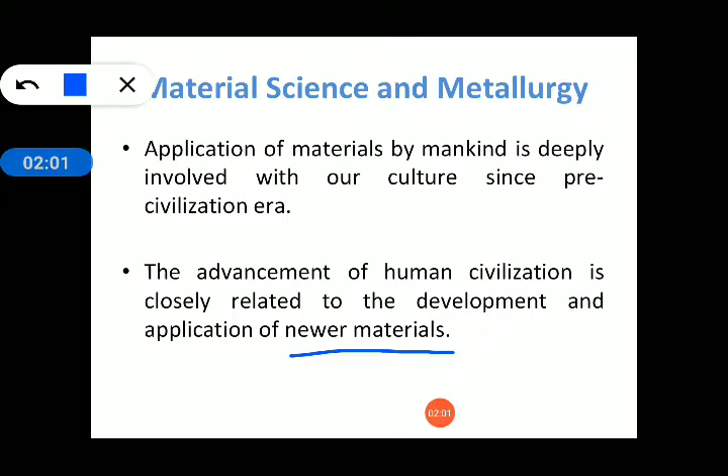The advancement of human civilization is closely related to the development and application of newer materials. So newer material means what? If you create something new in the existing material, then it is a newer material, or it is also known as an alternative material of the existing material.

At present, the scenario is that the advancement of any engineering discipline is not possible without the development of materials and their science, engineering and technology.

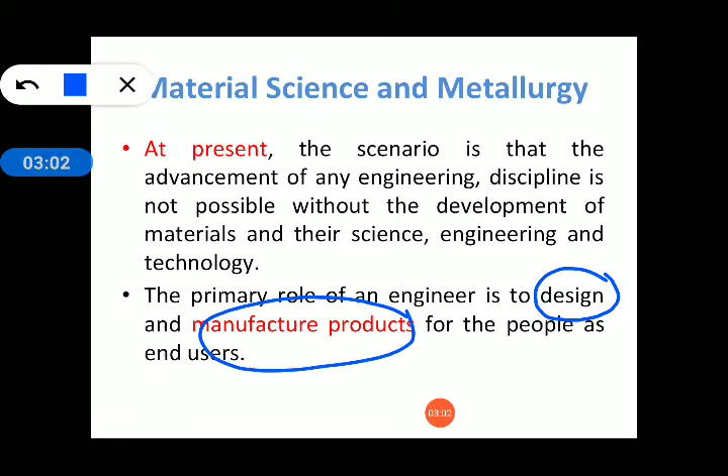The primary role of an engineer is to design and manufacture products for people as end users. So our main role is to design, and we have to design and manufacture products. For designing as well as manufacturing products, we must have certain knowledge about the material and its different phases, structures, and characteristics.

One of the important tasks for an engineer is to select the right material for manufacturing products, machines or equipment. This is the main goal, the main role or important task of an engineer. If we select the right material for that particular product, then the product will be successful in the market.

Why is it successful in the market? Because the material selection is right. The product will last for a very long time if the material is right, and if the material is not right or not appropriate, then it will not last for a long time. So selection of the right material is important for manufacturing the product, machines or equipment.

Now, selection of material is based on various requirements of the product, and once the material is selected, it influences a variety of aspects related to manufacturing process selection, machine required, tooling, reliability and service life of the product. These are certain characteristics which it influences, including reliability, service life, and tooling.

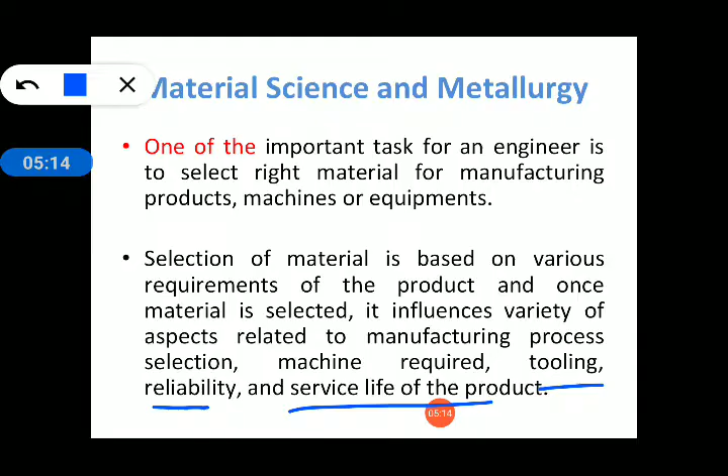Material affects various stages of the product life cycle, starting from product concept development, design, planning, manufacturing, inspection, use, service life, maintenance, disposal and recycling. So students, material affects all the stages of the product, starting from the product concept to the last stage, that is recycling. So on each and every stage, material can affect the product. The material knowledge must be very important.

Now, the combination of physics, chemistry, and the focus on the relationship between the properties of material and its microstructure is the domain of material science. So the main domain of material science is the properties of material.

Property of material is what? Means material hardness, stiffness, its brittleness, ductility. These are certain properties, including if the material is conductive. So the combination of material property and microstructure is the main domain of the material science subject.

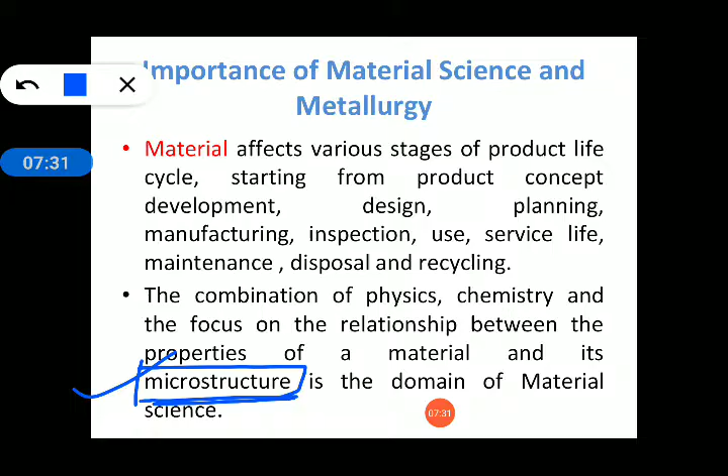Microstructure is nothing but the structure of the material. You can predict the property of the material using the microstructure. In the microstructure you can visualize which constituent of the material is emphasized over another material, which type of bonding is there, and likewise. So through the microstructure you can predict the property of that particular material.

Now, why is the study of material science and metallurgy required?

So, as I told you, this subject is very much important for all the engineering students, and for the mechanical and automobile engineers especially, these are really very important because they directly affect the product.

So, to be able to select a material for a given application based on its performance and cost, to understand the limitation of the material, and to modify or change its properties as per applications.

You can understand the limitations of that material, and according to those limitations you can use that material for particular products only. If you have an idea about the limitations, then you will use that material for some applications only.

And also if you know about the limitations, then you can modify or change its properties as per your required applications. Next is to be able to develop a new material.

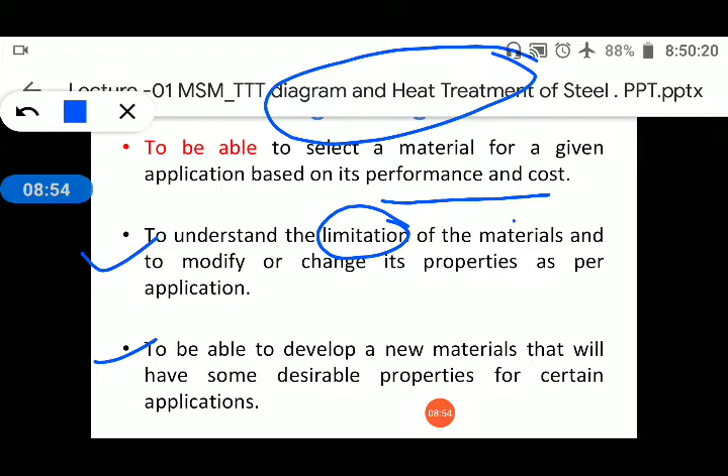If you have knowledge of this, then you will be able to develop a new material that will have some desirable property for certain applications.

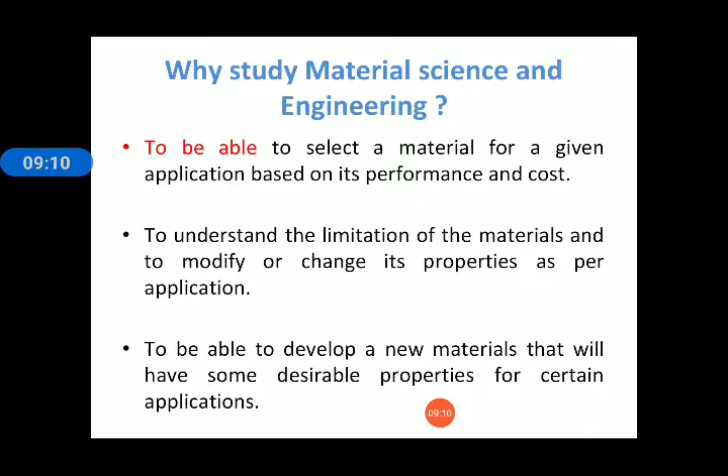So you can also develop a new material if you have certain knowledge about material science and engineering. Now, the classification of engineering materials. Engineering materials are classified on the basis of the following: chemical composition,

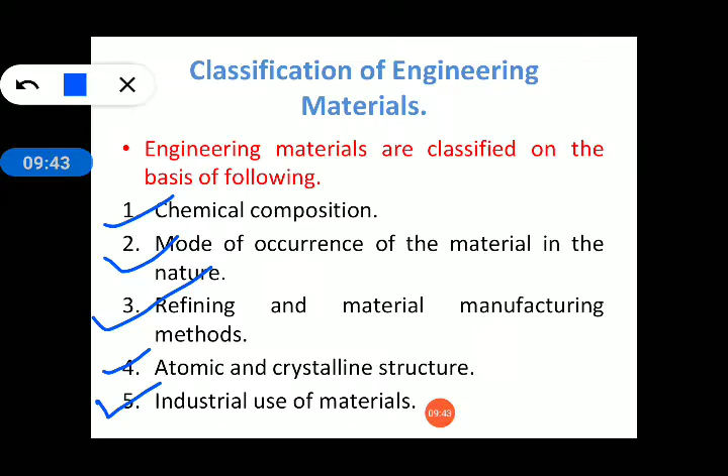mode of occurrence of the material in nature, refining and material manufacturing methods, atomic and crystal structure, and industrial use of materials.

for the future. Okay, so this is the classification of engineering materials.

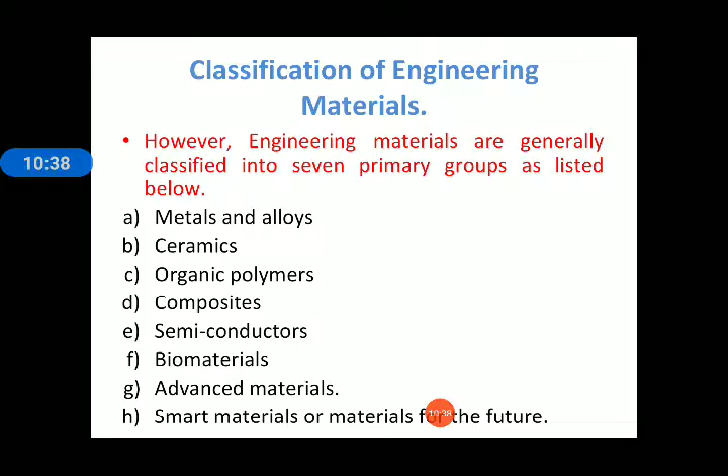Now, metals and alloys. Metals and alloys are the materials which are good electrical and thermal conductors.

At normal temperature, metals are generally solid, as we know. Mechanical properties of these materials are relatively stiff and strong.

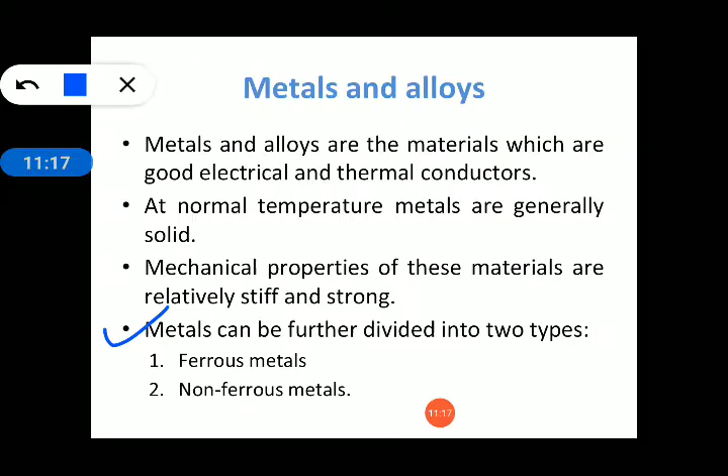Now metals can be further divided into two categories: ferrous metals and non-ferrous metals.

So what is ferrous metal? Ferrous metal is what? When iron is present in the metal as the main constituent, the metal is known as ferrous metal.

The iron component should be there. If you find iron in any metal as the main constituent, that metal is known as ferrous metal.

The properties of ferrous metal depend upon the percentage and the form of carbon present in them, and examples are steel, cast iron, wrought iron, etc.

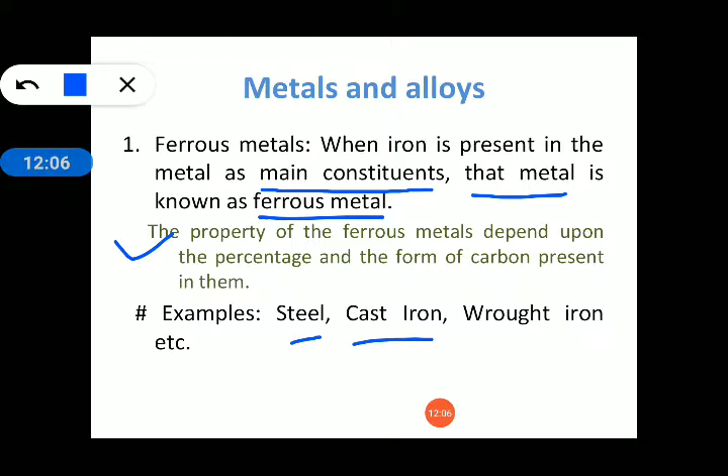Now non-ferrous: when iron is not present in the metal as the main constituent element but may be present as one of the alloying elements, that metal is known as non-ferrous metal.

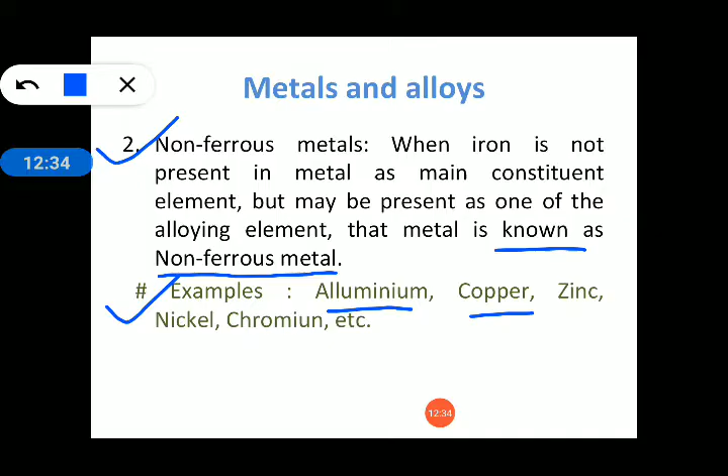Examples of non-ferrous metals are aluminum, copper, zinc, nickel, chromium, etc.

Now alloys. When two or more pure metals are melted together and form a new metal whose properties are quite different from the parent metals, then it is called an alloy.

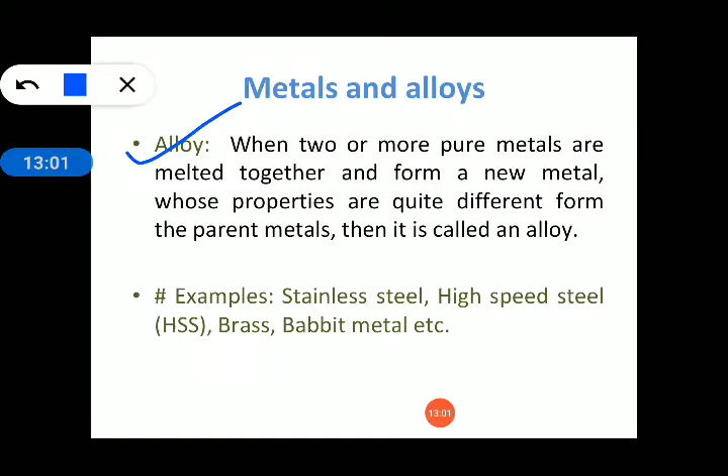Examples are stainless steel, high speed steel (HSS), brass, babbitt metal, etc.

Then ceramics. Ceramics are compounds between metallic and non-metallic elements. These engineering materials are crystalline and partly amorphous.

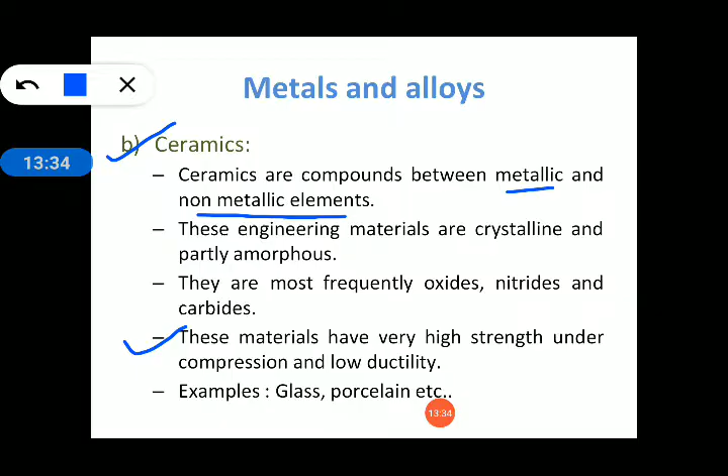They are most frequently oxides, nitrides and carbides. These materials have very high strength under compression and low ductility, and examples of ceramics are glass and porcelain.

Next one is polymers. Polymers are made from hydrocarbon based minerals.

There are two types of polymers, that is thermoplastics and thermosetting plastics, as we discussed in the previous semester.

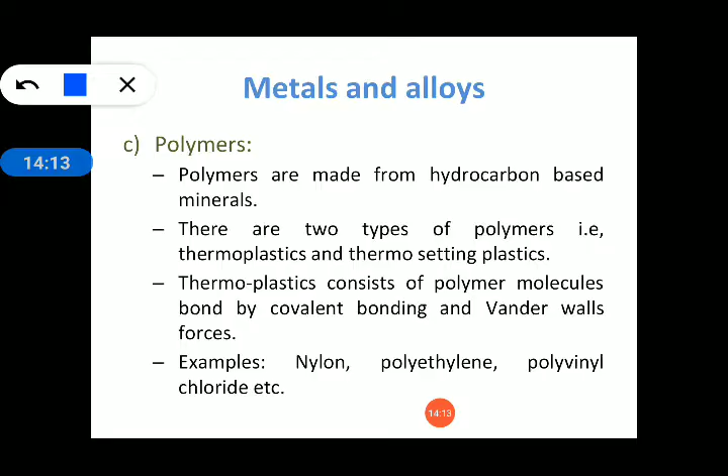Two types of polymers: thermoplastic and thermosetting plastics. Thermoplastics consist of polymer molecules bound by covalent bonding and van der Waals forces, and examples of polymers are

nylon, polyethylene, polyvinyl chloride, etc.

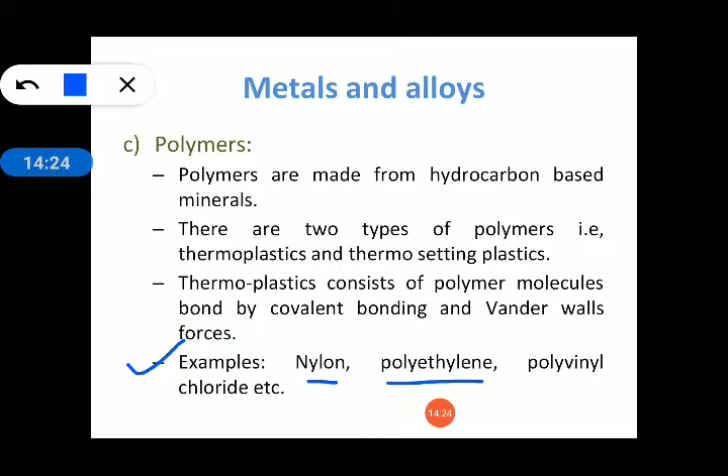And the last one is composite. These materials are multi-phase materials which are obtained by artificial combination of different materials to attain properties that the individual

components cannot attain. This means you have certain materials, but you may find this material is not better or perfect for your end user, or the material is not perfect for your

particular product, so you can produce a newer material with the help of this composite.

Composite is nothing but a multi-phase material which is obtained by the artificial combination of different materials. So you can

combine different types of materials, and those materials can be melted, and in the melted phase they get mixed with each other - all the metals or all the different materials - and then solidified.

The solidified product is nothing but your composite material, in which you will find your desired application, your desired properties for the particular product.

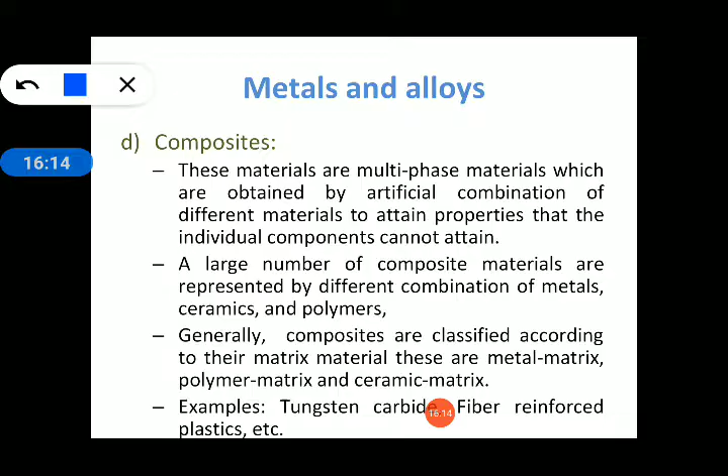A large number of composite materials are represented by different combinations of metals, ceramic and polymers. Generally, composites are classified according to their matrix material.

These are called metal matrix, polymer matrix and ceramic matrix, and the examples are tungsten carbide and fiber reinforced plastic.

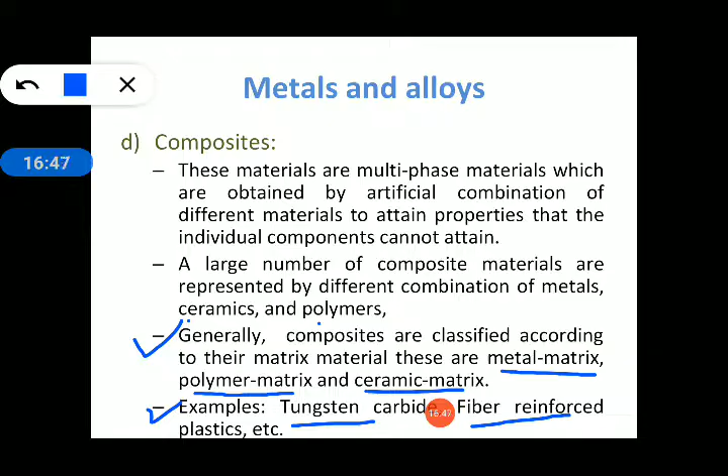In the next lectures we will see some other terms related to material science, and we will start the iron carbon diagram. Thank you very much, friends.